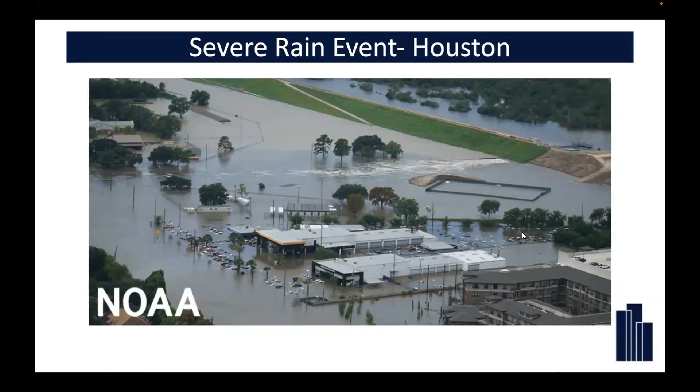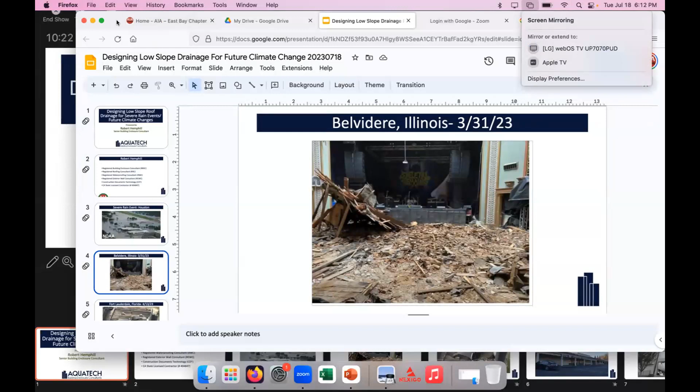The next slide shows a roof in Fort Lauderdale, Florida that collapsed. I don't know the specifics as far as how many people were injured, but again, it's an illustration that roof collapses are happening all over.

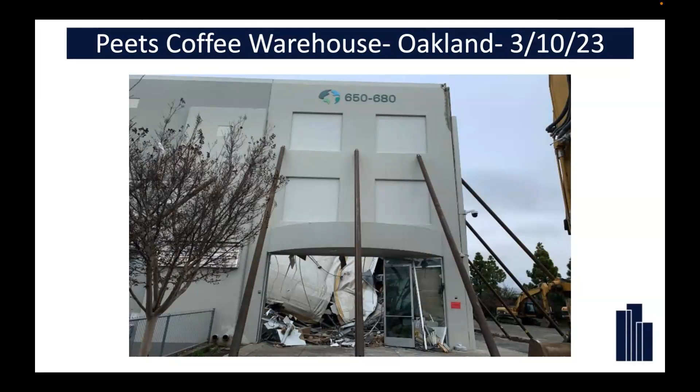These local events I'm going to highlight because I think with better design, we probably could have avoided these roof collapses. To summarize, I think there's a big problem with the local California building codes as they're written.

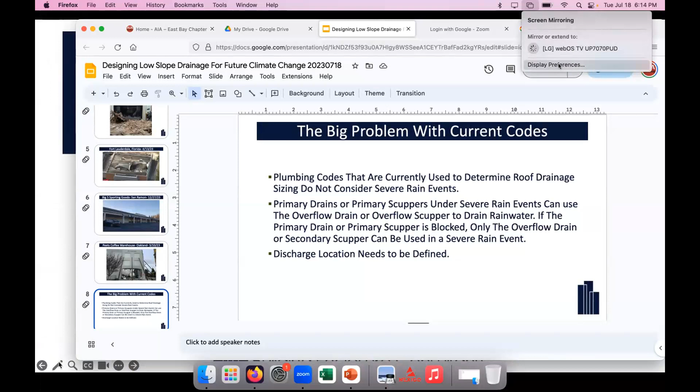One, they don't really size roofing drainage for severe rain events. The way roof drain sizing is done right now is you take a severe rain event for 60 minutes, expecting steady rain for 60 minutes, and that event takes place once out of 100 years. I think rain events are becoming more and more severe, more and more frequent. I know you're experiencing some of the weather issues that are out there right now.

The primary drains or primary scuppers. If you have a primary scupper that experiences a severe rain event, that primary scupper will actually take the rain off the roof along with the secondary roof scupper. These two drainage systems allow water to exit a roof under a severe rain event. However, if the primary scupper is blocked up or doesn't function, you're only depending on the secondary roof scupper to perform. That becomes a problem because instead of having a safeguard, now you're depending on one secondary roof scupper to take water off the roof.

The other problem with the code is that they don't define what a conspicuous location for roof discharge or roof drainage is, and that becomes a problem. You're going to see this in the slide. It's particularly poignant because there was a roof collapse event where one person died, where if the overflow drain had been located in a conspicuous location, that life may have been saved.

We're going to start with learning objective number one: how to size roof drainage. This next series of slides will show you how roof drainage size is done.

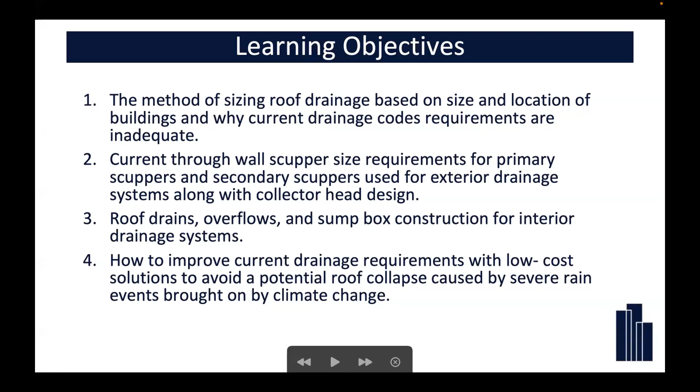Problem with the current codes is throughout the United States, there's a lot of different states that use different codes. We in California use the Uniform Plumbing Code for roof drain sizing. Other parts of the country use the International Plumbing Code for sizing, and New Jersey actually uses their own particular code. There's states and cities that mix up different parts of the code, so you're going to see a stark contrast of what the problems are with different codes.

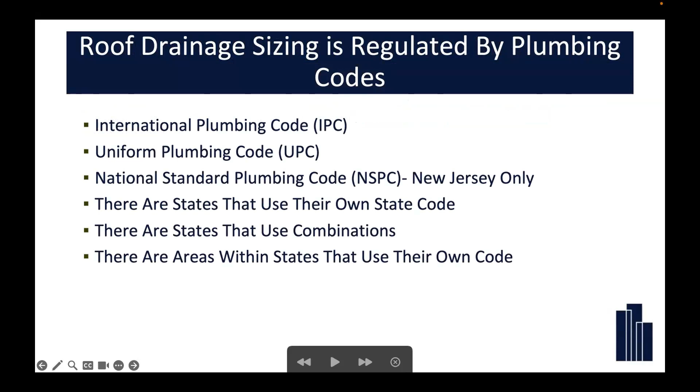Going further, we're going to talk about how to actually size roof drains themselves. According to the International Plumbing Code, which we don't use here in California, you take the roof area, the square footage of the flat roof area, and add half of the square footage of all the walls into the equation to determine the size of the roof area that you need to drain.

This is probably pretty simple. You take the roof, you take all the walls, you add all the square footage of all the walls in this particular case, add that to the roof area, and that's the actual size of the roof that you have to drain, and that's how you size it.

The problem is when you use the UPC, it's a different set of parameters. The UPC breaks it down into a lot of different categories, and we'll go over these so you'll see the differences between the UPC and the IPC, and why some parts of the country go with the IPC and why we go with the UPC. I don't understand it—to me, the UPC is a better code provision itself.

For the UPC, you take the roof area and add 50% of a wall area, similar to the IPC, which adds 50% of all wall areas. But the UPC is a little different: the Uniform Plumbing Code says if you have two walls across from each other, they basically cancel out. The theory is that the rain direction is in one direction, so one wall blocks the rain and another wall collects the rain—the net effect is zero.

For adjacent walls, the UPC defines the roof drainage sizing requirement as taking 35% of one wall area, 35% of the second wall area, and adding that to the roof area—that's the actual roof drainage area you have to account for. The theory is that wall 1 and wall 2 will block each other somewhat, so there's not as much rain, not 50% rain as with a single wall.

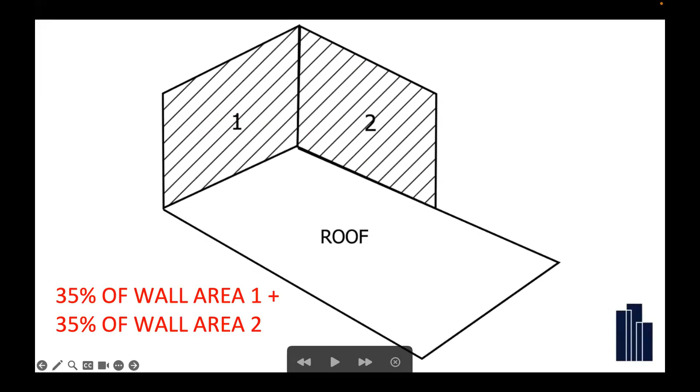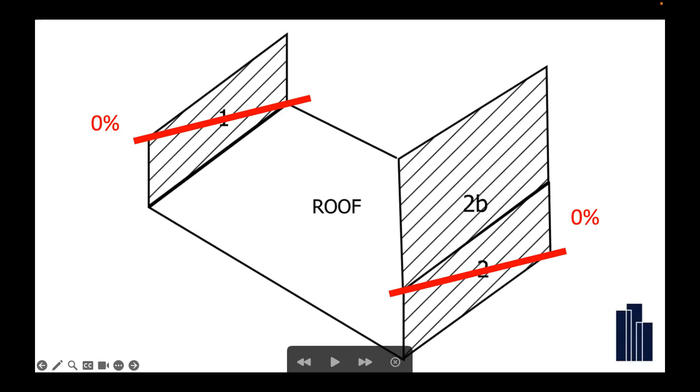Take a situation where we have wall area 1 and wall area 2—we both know they cancel each other out. James is going to tell us what 2B is. What would you add to the calculations of that roof area for wall area number 2B? We know these cancel out because they're across from each other. James says 2B is going to be 50%. James is right, thanks for listening James.

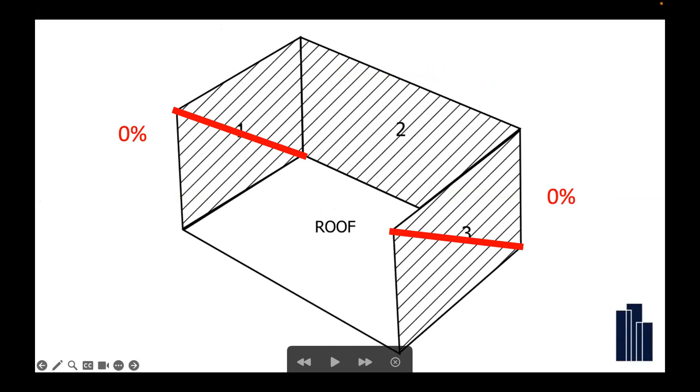All right, you're learning how to do sizing of roof drains. Frank, 1 and 3 we know cancel out—this is according to the UPC, not the IPC. What's the roof area requirement for 2? Excellent, Frank. You can see how it gets more and more intricate, but it's really not complicated when you break it down.

We all know that because the walls are across from each other, they're zeroed out, and wall area 2B, James, is 50%. They're not adjacent, 50%, side by side, 50% of wall area 2B. Here's another roof area, we know all these. James, now you got this one. Yeah, 35%.

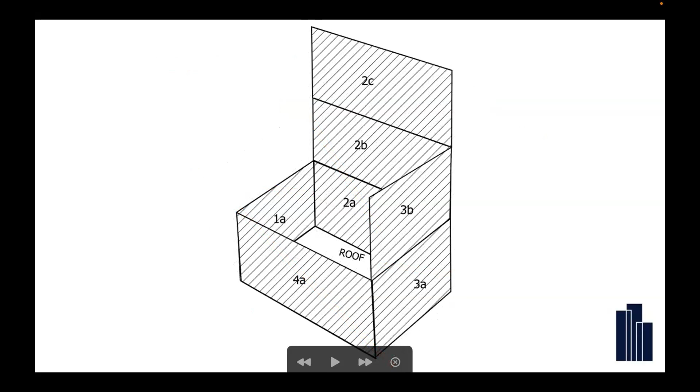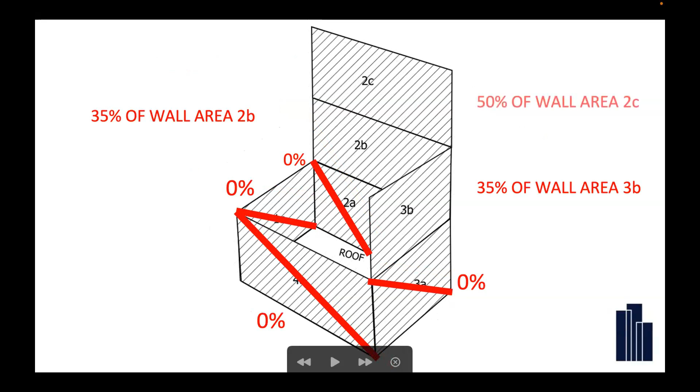Okay, another scenario, we know we have all the zeros at the bottom because they're all across from each other. 2B and 3B are going to be 35%. And Robert, what's going to be 2C? 50. Robert says 50%. There you go, 50%. All right.

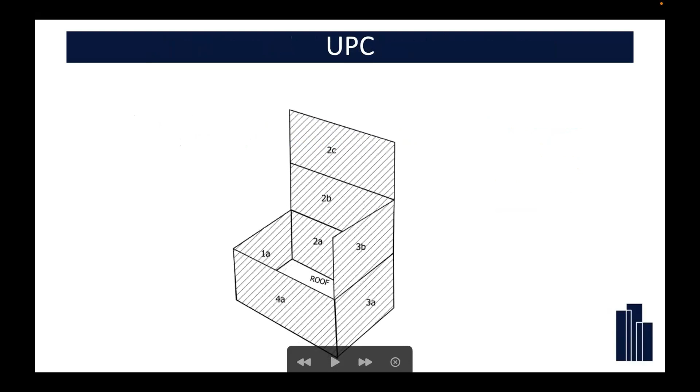Problem with the UPC, it doesn't jive with the IPC, International Plumbing Code. Remember, some states are following the UPC, some states are following the IPC. IPC, getting back, 1/2 of all the vertical walls. So in a particular case like this, IPC is saying 50% of all these walls are added to the roof area. And the UPC, again, it's different from the IPC. They eliminate all these walls on the bottom.

You've got 35%, 35%, 50%. The UPC, to me, is a more thoughtful code than the IPC, but you can see that there's probably a universal or statewide issue as far as what this square footage of a roof area that needs to be drained.

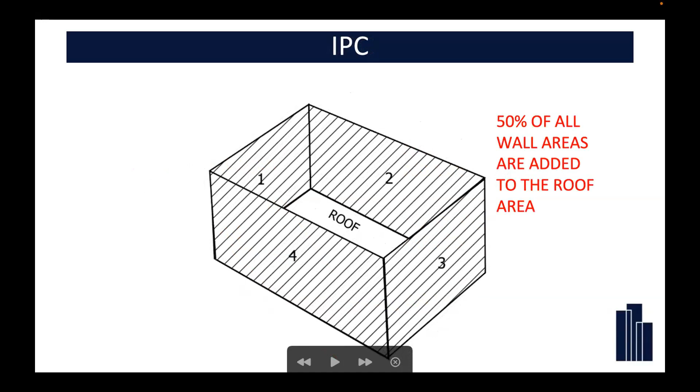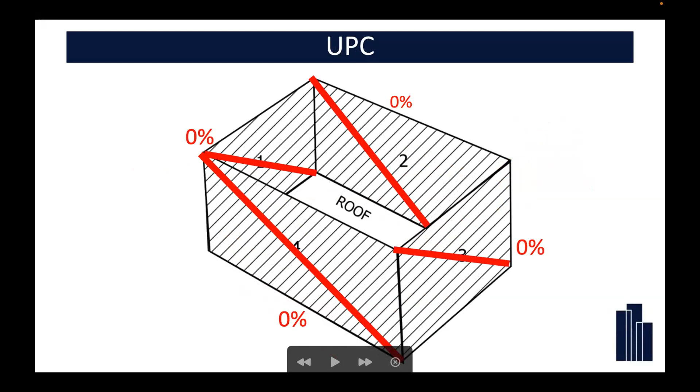IPC, we know in this particular case, Frank, how much do we add for all these walls? 0, Frank. Oh, for the IPC, sorry, Frank, you're right. For the IPC, 50%. For the UPC, what do we add? Excellent. Whew, sorry about that, Frank. I take that back, no, I do. Don't add. All right.

I apologized. All right, getting back to the UPC, we're going to talk more about them specifically because that's what we use in California. You take the roof area plus the wall area calculations, which you all learned how to do. You take the rainfall rate and the amount of inches for 60 minutes, and I'm going to show you more about that. You have to convert that to gallons per minute. These formulas are, there's a constant, 0.0104. This constant is not really that important to remember.

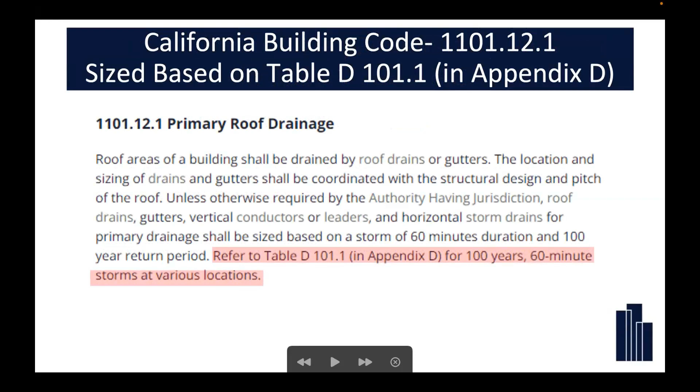It's nice to know how the roof areas are actually calculated, including walls. But most of the time on a project, the structural engineer is going to calculate the rain requirements, or the plumbing engineer itself. But just to show you that the California Building Code, the roof drainage is based on Appendix D in the actual plumbing code itself. You have to refer to the plumbing code. You have to convert the roof area to gallons per minute.

And that tells you what the actual, oh, I went backwards, my bad. All right, it jumped ahead. UPC, Uniform Plumbing Code, Appendix D in the code itself. It tells you what the rainfall rate is for 60 minutes and a 100-year interval, and it says 4.6.

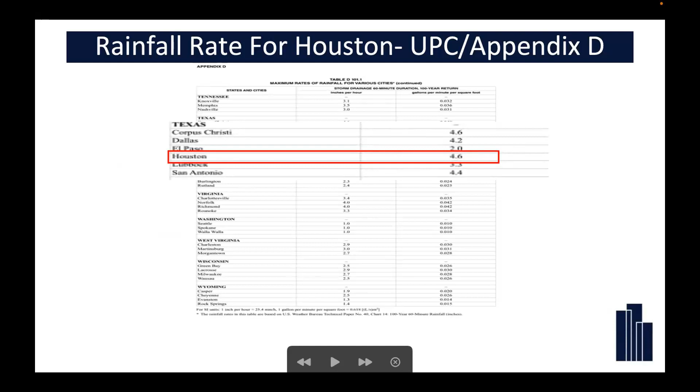I'm going to compare this with San Francisco. So that's why I'm showing you Houston. The National Oceanic and Atmospheric Administration has a better chart. Instead of doing every 60 minutes, they can break it down to 60-minute times, or they can break it down to 15 minutes or 30 minutes. There's a lot of different information they've calculated instead of just the Appendix D with 60 minutes.

When you have Houston saying that for 60 minutes, 4.6 inches per that hour of time is what you're going to get. If you had a sudden rain event and you had 30 minutes that deposited 3.54 inches, and you added another 15 minutes, and for 15 minutes there was no rain whatsoever, you're still above that 4.6. This code is inadequate for Houston.

And what Houston did was very smart, is that they had made an amendment to their actual code. And they just said that for all primary roof drainage, all roof drainages, we're going to assume 8 inches per hour.

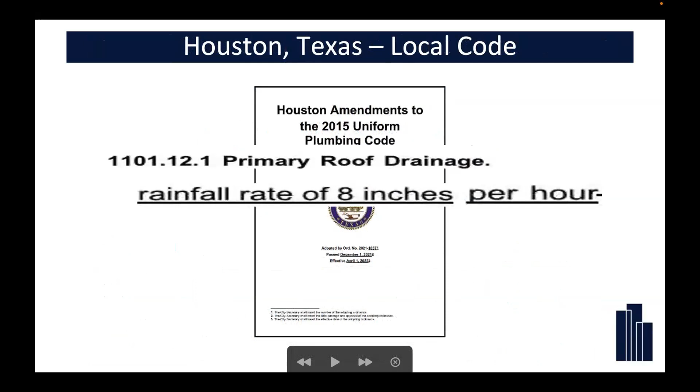Now, here's a case where San Francisco, where we are, the UPC appendix, oh, we lost the D, but it says 1.5 inches. You go to the National Oceanic Atmospheric, you break that down. Let's say rain doesn't fall constantly at the same rate for 60 minutes. Rain falls at different rates. For 60 minutes, according to the NOAA, it's 1.29.

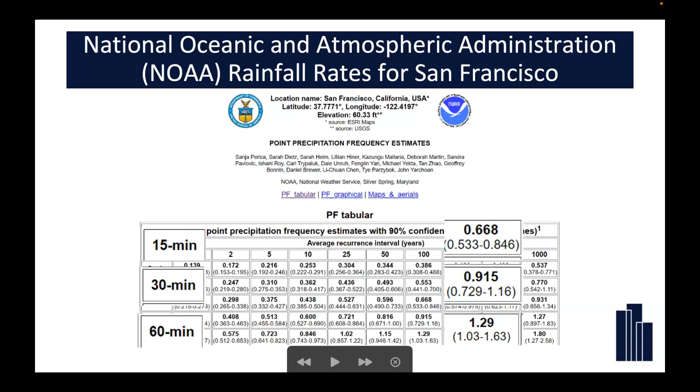You go for 15 minutes, they say it's 0.668. For 30 minutes, it's 0.915. So if you took a rainfall for an hour and for 30 minutes it fell at 0.915, and then added the 15-minute figure on top of that, you can see it's already above what San Francisco thinks is going to be 1.29.

San Francisco is also a little bit strange. It's the only city I know of that actually mandates you take the storm water and tie it into the sewer system itself. If anybody knows another city that does this, I don't know about it, but it's a strange thing about San Francisco. It's actually in their local building code—you take the rainwater, storm water, and tie it into the sewer system itself.

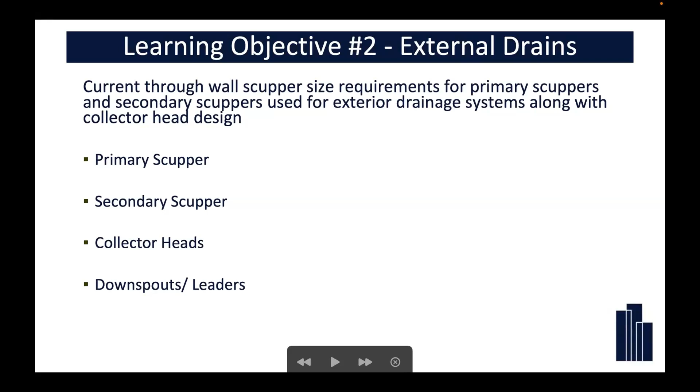Our learning objective number 2 is going to be on external drains. I broke it down to primary, secondary, collector heads, and downspouts—all parts of drains that are external to a building that are piped to the outside.

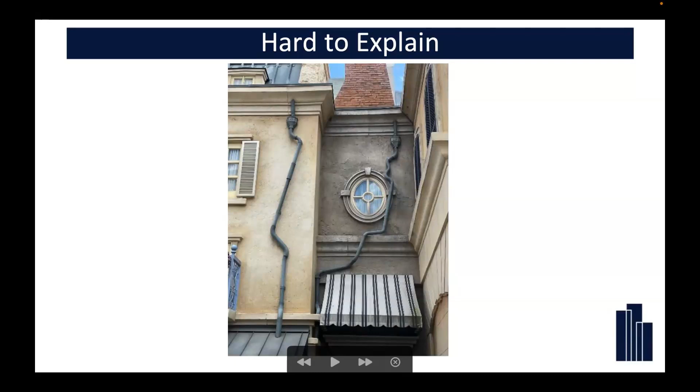Getting back to the California Building Code, we're going to talk about secondary scuppers. They're required for entrapped water. Anytime you have a wall that can collect water, you have to have a secondary—there's no ifs, ands, or buts about it. It's very clear that any area wall that can trap water, you have to have a secondary, a way of getting water off that roof in case the primary is blocked.

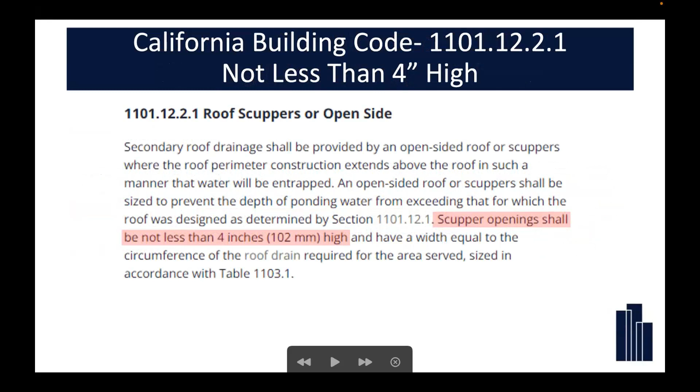Another code requirement, this is going to sound really strange between the two: the California Plumbing Code demands that the scupper opening be at least 4 inches minimum—that means height times width, so it's got to be at least a 4x4, doesn't matter what. However, the California Building Code says the scupper has to be no less than 4 inches tall; they don't talk about the width. Why one has a 4-inch minimum width times length, and one has just the height, I don't know, but that's okay.

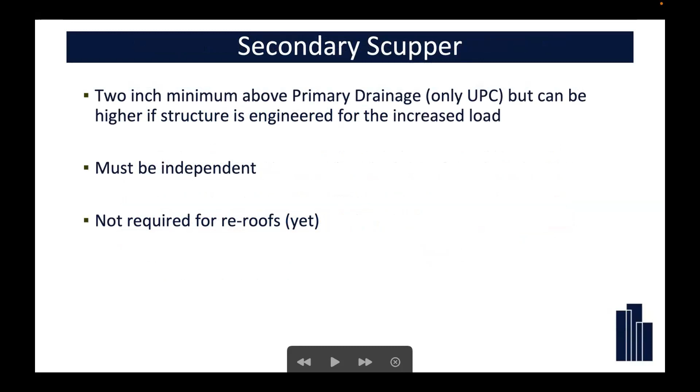We're talking about the secondary scuppers. There's some code requirements: 2 inches minimum above the primary, must be independent, not required for re-roofs yet. Secondary roof drains must be at least 2 inches above the primary drain. I don't know exactly why this 2-inch requirement was made, but I have a couple of theories. One, if the primary is blocked up with debris down low, at least your secondary is up a little higher, so maybe that debris isn't blocking the secondary. The other is that the secondary has to be independent of the primary, and a 2-inch height requirement actually moves it away from the primary a little bit. That's the only reason I can find for this particular code requirement, but it's there.

The other part of it, California code requires independence of the primary roof drainage—the secondary system has to be independent of the primary, so it's got to be separate. This code requirement is also changing: next code cycle, all re-roofs are going to require a secondary roof drain automatically. But currently, if a roofer goes up and re-roofs a building that has only one primary drain, they don't have to add a secondary scupper by code.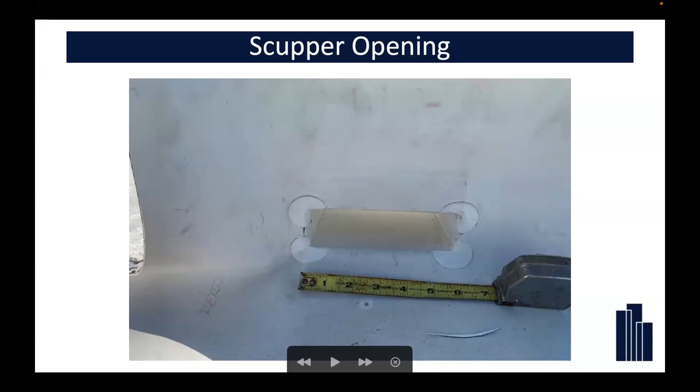This particular roofing contractor had all these overflow scuppers made for this particular project, and he made them all wrong. They don't meet code. It has to be at least 4 inches minimum. You can see in this scupper opening, another job in Tracy I was on, the scupper opening is less than 4 inches. It's got to be at least 4 inches tall and 4 inches wide if you go with the plumbing code.

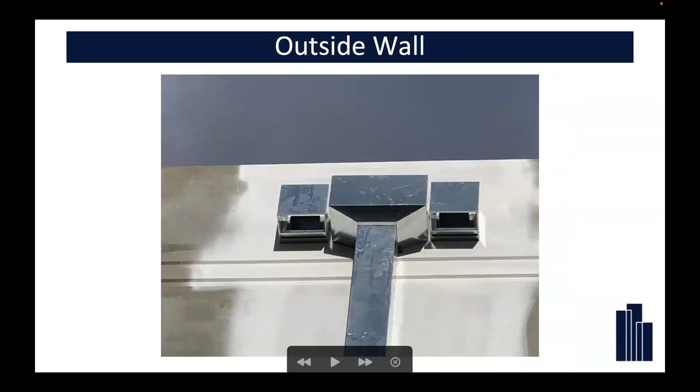Job in Oakland I was on. Here's an outside wall. In the center you've got a primary scupper. On the right and left-hand side, you have secondary scuppers. It all looks pretty good until you get into the interior of the wall and look at it. There's the primaries in the middle, the secondaries are on the side. I threw a tape measure on it. The primary is 24 inches across. That's a nice size, it's a big building.

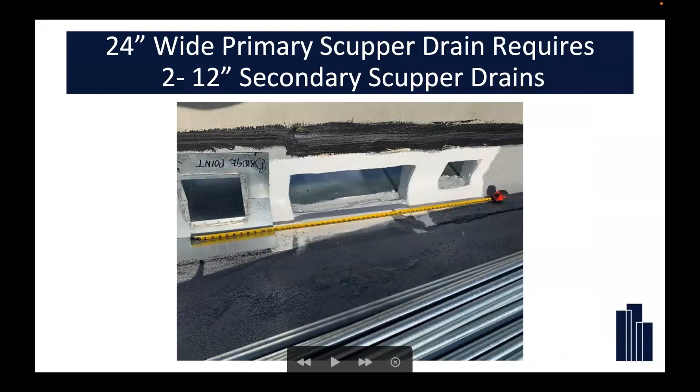But the secondaries are only 8 inches wide. So you basically have two secondaries that are 8 inches wide, 16 inches, trying to make up for a 24-inch primary scupper. This could be a problem.

Now I've heard this argument before, and I've seen this detail before, where an architect will draw this collector head and put a circle or a hole, an outlet, in the actual collector head, which on the surface that architect will tell you, well, this is an overflow. It's effective in case there's a lot of rain, it can actually drain out of the overflow. But I always ask this question.

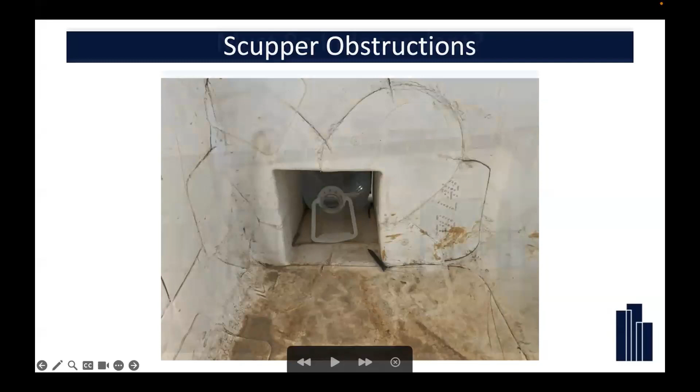Another job, another architectural, AIA East Bay architectural tour that I took. Here's a case where, again, a new building, and I'm looking at this and saying, okay, where's the overflow? I thought I would be polite, so I sent an email to the actual architectural firm, the guy that was doing the tour. And I said, by the way, I'm just concerned that there doesn't seem to be an overflow on this particular project. I'm looking at this building, it looks like you have a primary scupper only.

Well, the architect was very nice. He wrote back and said, in this particular case, the overflow is stacked right on top of the primary. So what you're looking at is the primary, the overflow is actually, the actual primary is unseen, it's going into that collector head. But remember the rule, 2 inches minimum. It can be more than 2 inches if it's engineered. But if the primary scupper is 4 inches tall minimum, remember James, that's 4 inches of water that's going onto that roof.

Anyway, not done correctly. Oh my God, another job in Oakland. No, this was actually in Berkeley, right around the corner. You can see that there's a scupper at the bottom, it's rectangular. There's a round circle at top, that's the overflow pipe.

Remember, when you're sizing drainage, if you have a drain coming from the vertical, the water can get completely around the hole and drain down. But if you have a hole that's on a wall like this, the water that's supposed to drain out is only going to drain out at the bottom of the hole.

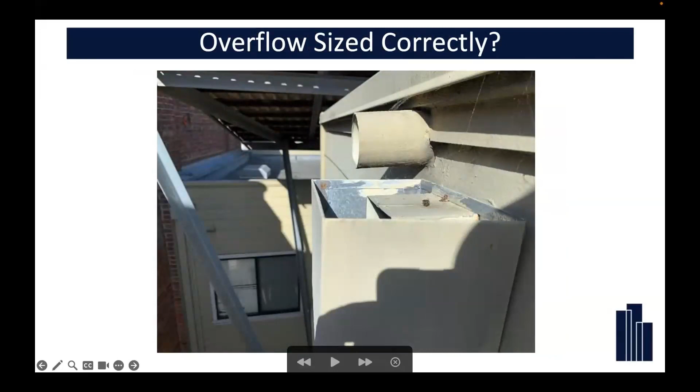But showing you what I actually saw on this project site, you see the overflows are round circles, but the scupper is a rectangular object. What's worse is they actually took a downspout and ran it in the middle, a downspout from the roof below, and blocked off some of the drainage. This is not the way to do it.

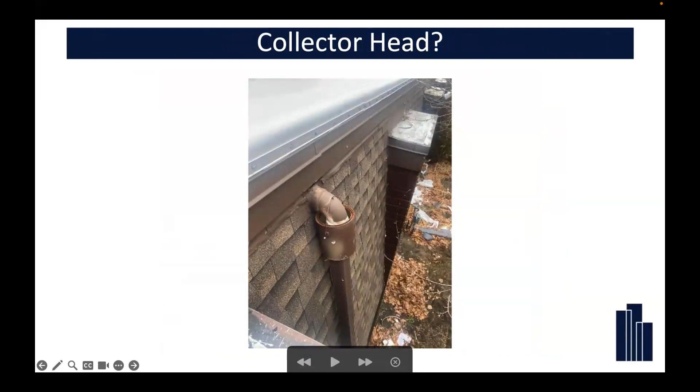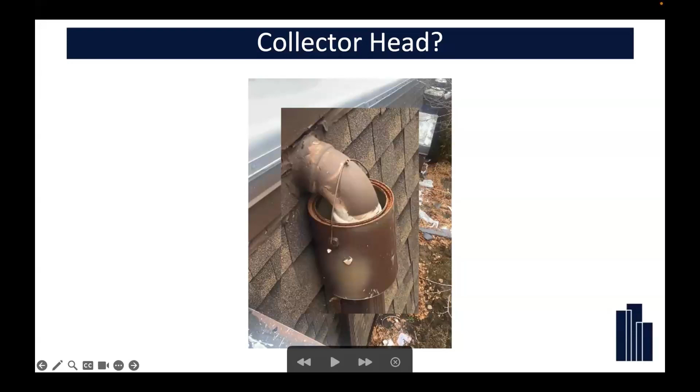All right, collector heads. We're going to talk a little bit about collector heads. This one is actually kind of a nice job in a way, they're recycling building materials. They took a paint can and made it into a collector head. Lots of problems with this, but it's ingenious. It's not the correct way of doing a collector head, and we're going to talk about that in a second.

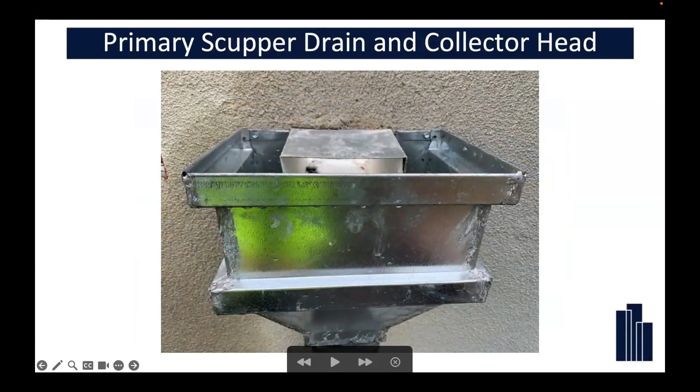This is a horror story from a project in Oakland I was on doing window testing. They have a collector head mounted up really high. And I get this point a lot, where somebody says maybe they want to just hide the primary scupper. I always point out, well, how are they going to hide the overflow? Anyway, so they hid the primary scupper, ran the collector head up too high, and cut the back of it. And what happened was it started to leak.

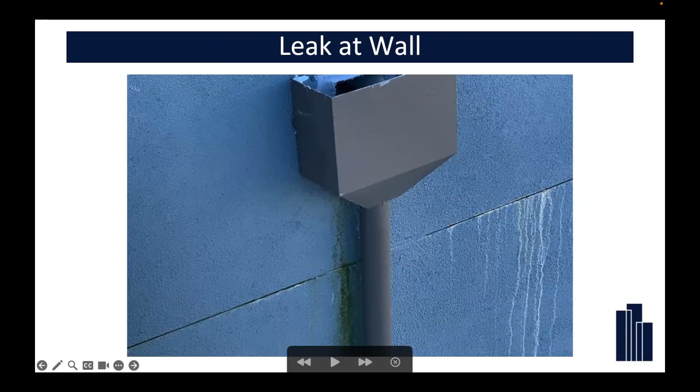I know it's hard to see, but at the wall, not between the leader pipe and the collector head, but the wall itself, it started to leak. It's draining part of a green roof, that's why you see that green stuff there. It hit a control joint on the stucco and ran across.

One thing I want you to look at is down below. This building is like 80 feet up in the air in Oakland. Somebody's got this horrendous looking thing on a new building, because the collector head is too high. They did it wrong.

I went out there six months later, just doing testing again, and this is what it looks like. Can you imagine having a building like this, a new building, 80 feet up in the air, and you've got this stuff going on?

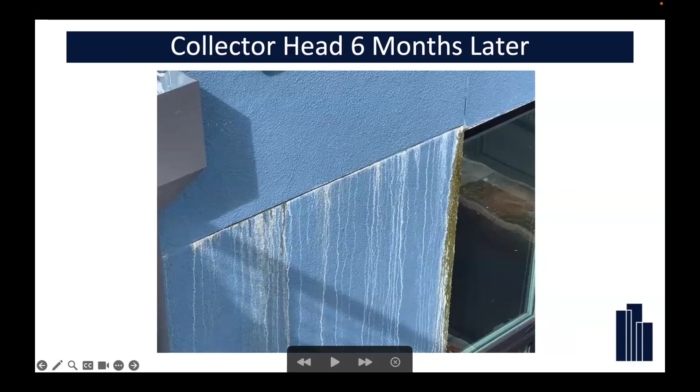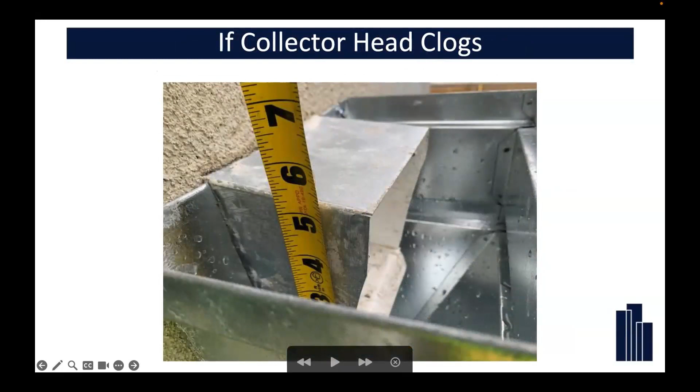If a downspout gets clogged up or the collector head backs up, the collector head in this particular case can direct 5 inches of water back onto that roof. Whether that roof is engineered to take 5 inches of water, I don't know, but this is a poor design.

Oh no, it's got to play. Mike, what's going on here? Are they seeing that? What are they seeing? Okay, maybe. All right, I hope this plays.

This is a key point: collector heads and downspouts can clog up.

Oh no, it didn't play. I'm sorry about this, guys. It's really a great visual.

And it's supposed to play as a video. Don't know why. Any reason, Mike? It played in the office today. I checked. I made sure it played.

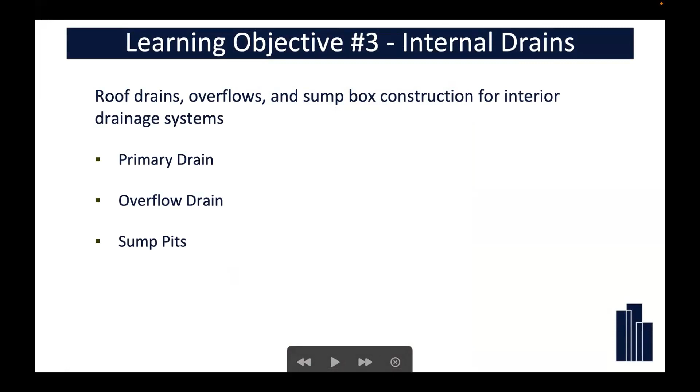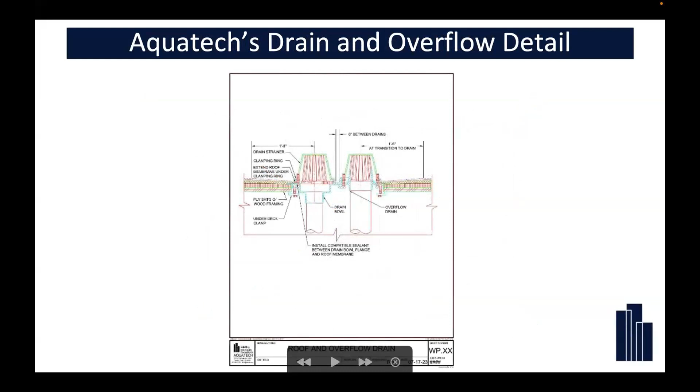In Aquatech, we draw up a drain and overflow detail like this to show the components of the actual drain. If you ever see this detail or it's in your library or you're using it, get rid of it. Use this instead, and I'll tell you why.

One other point: there's a code requirement that roof drains shall have dome strainers, unless it's a flat roof deck, then you can have a flat strainer. This is a picture of an actual roof drain, overflow drain. You can see that there's a ring all the way around that's blocking that overflow grate, and that's the 2 inches that's required.

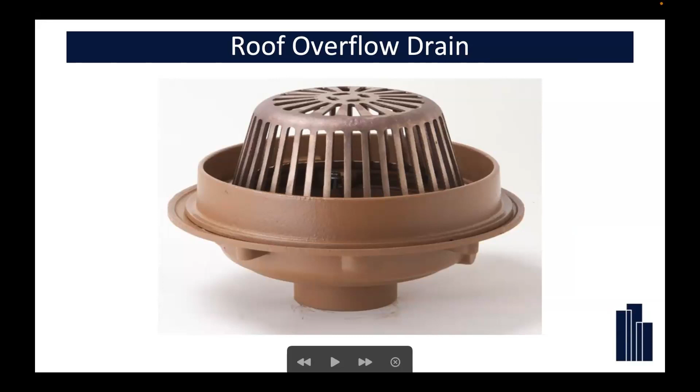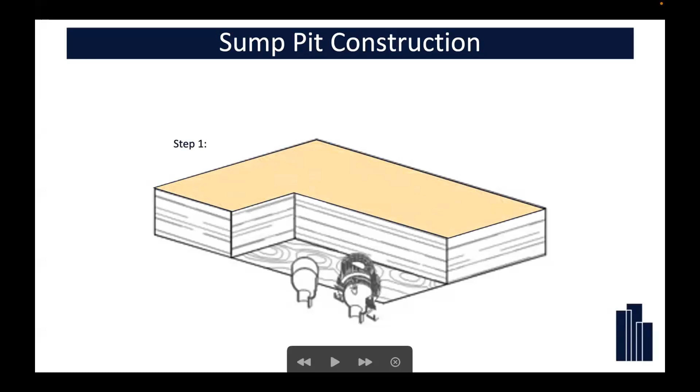I'm going to take you one by one through them. You have a sump pit construction. Some contractors have to actually build a recess into the roof area itself. This is a case where the sump pit construction is taken, and in order to detail this correctly, you have to put a field membrane on top of the roof deck itself.

You have to put a field membrane at the bottom of the sump pit. You have to build up the walls. Each one of these components takes a roofer time and trouble to put together -- a lot of welds that actually have to be done. You build the walls, then you have to do an outside corner on the top, and an inside corner on the top. All these 6 steps cost a roofer money and time and trouble to build a sump pit that we shouldn't be using at all.

Sump pits collect debris -- that's just what they do. They're flat at the bottom, they don't direct the water off, and you get accumulation of stuff.

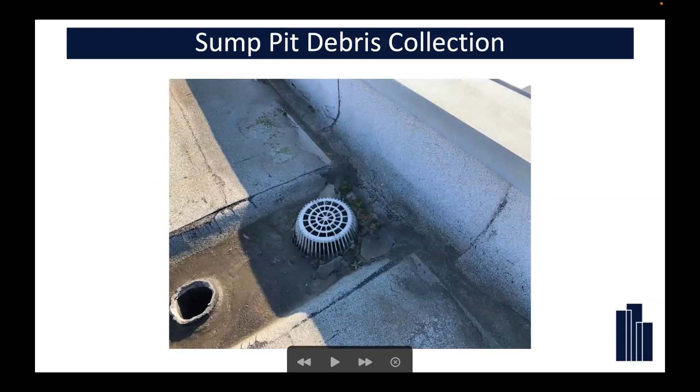A smarter way of doing it is to always use a taper drain system. There's a lot of different ways of doing it with tapering the ISO. In this particular case, they even actually make ISO with a taper system to the drain itself. We think it's a lot better detail.

This is a job in San Jose, a Hilton hotel, where they use the roof and overflow drain, but it doesn't have a sump pit. Everything directs the water to it -- a lot less time and trouble for a roofing contractor. All he has to do is put the membrane into the drain bowl itself, seal it, clamp it, and then he's done. He's not doing all this welding.

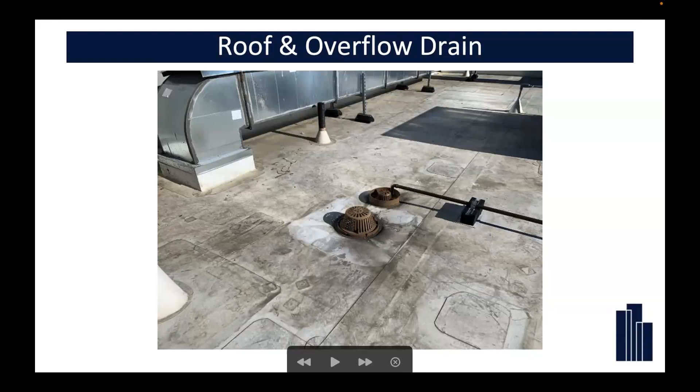Okay, we're getting towards the end here. What time do we have, James? Okay, we're doing it right. We're probably going to finish a little bit early.

That's okay, we're going to talk about best practices. This is what we at Aquatech always recommend, and I'm going to go step by step. We always recommend the addition of a secondary scupper on re-roofs. We know that this code change is coming, but we've always been recommending that if you have a re-roof and it doesn't have a secondary scupper, add one.

This is going to change, so it's not a big deal. This is actually the code requirement right now that is going to change. You can see that recovering doesn't require a secondary drain yet.

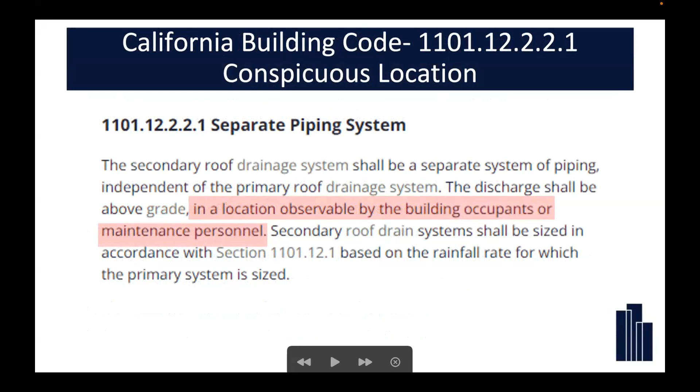We also believe in locating overflow piping in a conspicuous location. This is where we get into the tragic part of the presentation. I'll explain why. The code doesn't define conspicuous location. All it says is in a location observable by the building occupants or maintenance personnel. What that means, nobody defines it, but we will - what we recommend at Aquatech.

The problem with this is there's actually an exception to the code right now where you can take the overflow or secondary drainage and tie it into the primary downstream of the last primary roof drain. You can't see whether the primary drain is blocked up with this particular code exception, we think this is a bad idea. They should take this out of the code.

Trying to explain this a little bit further - job in Oakland, roof drain and overflow pipe. You can see at the bottom of the photo there's some new concrete that's been put there. That's where the primary drain is draining out. That pipe on the wall is actually the secondary overflow.

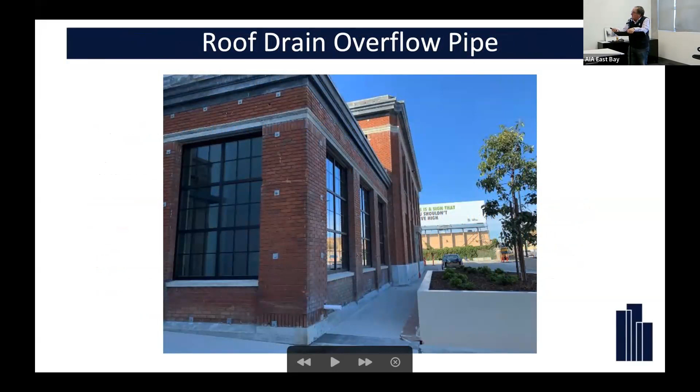It's in a conspicuous location. Whether it can be observed by roof maintenance personnel or anybody else, I don't know. You certainly could trip on it, but that's a conspicuous location. We don't think that's the best way of doing it.

Getting back to this tragedy - Peet's Coffee Warehouse, 3/10/23. I live in Oakland, I can tell you for a fact it was raining cats and dogs that night. At 3:30 in the morning, there was a man that was killed. He was in the Peet's Coffee warehouse. The roof collapsed.

Fortunately, somewhat, the next shift of workers was supposed to start in another half an hour. There could have been a lot more fatalities, but this could have been avoided if we followed putting an overflow pipe in a conspicuous location.

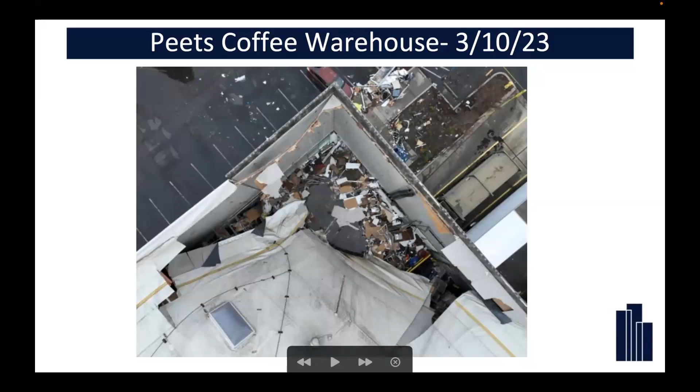I drove to the site - again, I live in Oakland, so it wasn't far away. Here's the actual picture of it, the collapse itself.

Here's the problem - these are two pipes. One's the overflow and one is the primary drain. Which one's which? Now, James, I know what you're thinking - you're thinking okay, they got the splash blocks, the splash blocks probably tell you that the primary drain is on the right. But if it's 3:30 in the morning, you go into work, it's raining cats and dogs, and water's only coming out of the overflow, not the main drain, you're thinking everything is normal. It's not a big deal.

There's a chance that if you had known that the primary drain was blocked up and water was only coming out of the overflow, you may not have gone into that building. You may have called somebody to say, hey, you got a problem up there on the roof - the main drain is blocked, water's coming out of the overflow.

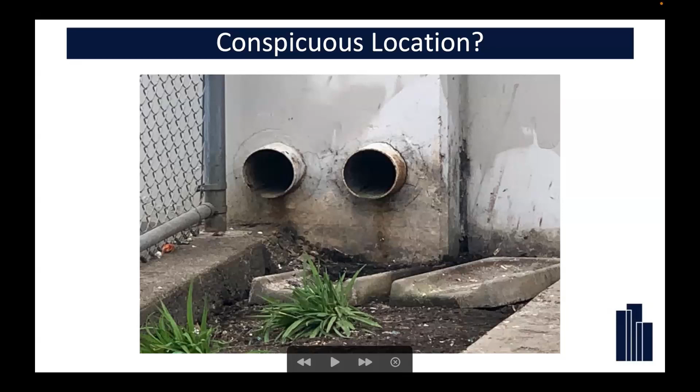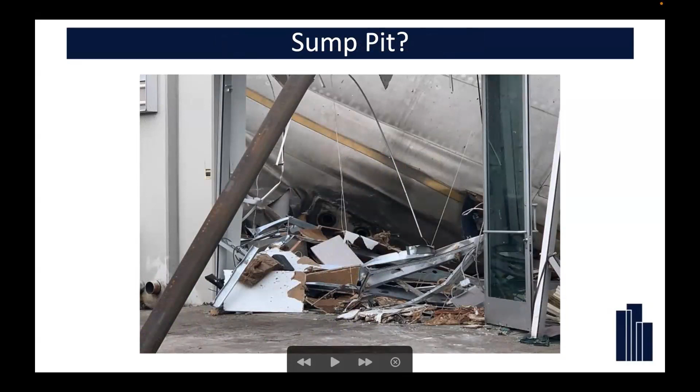In this particular case, here is the collapse. If you look at it, from you in the audience, it's hard to see, but there's a sump pit there. And there's an overflow ring that tells you that the overflow was on the left-hand side coming down the wall. I just think that this tragedy could have been avoided if that overflow had been in a conspicuous location.

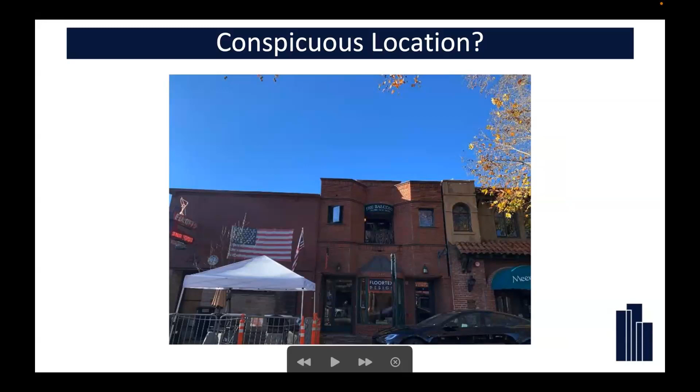Now I'll show you a conspicuous location. Here's a building, the building in the center. You're supposed to tell me where is the overflow. I'm sorry, I can't ask the audience because you can't see it that well. But here's a particular case where the overflow is right above a window, way up high.

Now, if this primary drain was blocked up and water was coming out of this overflow, it's 3 stories up. There's probably somebody on the street that might have noticed it. Whether they would have paid any attention to it, I don't know. But a fire department or a police department coming by, they might have said, hey, you got a problem. So locate that overflow in a conspicuous location.

I don't care if people get wet. We want to save lives. We don't want the roof to collapse. We want people to know that there's a problem.

All right, another best practice: double the size of the secondary scupper or add another secondary.

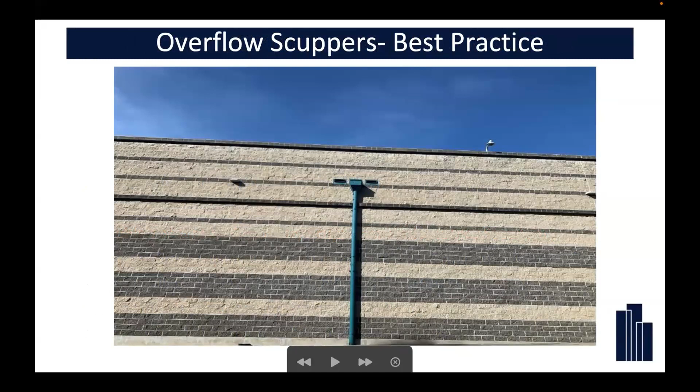Easy, this is done well. You can see there's a primary drain in the middle with the downspout, and on both sides there are overflow scuppers, twice the size or the same size, but it basically doubles the size of the primary scupper itself. Remember, if a severe rain event happens and water is coming down overwhelming the primary, the secondary kicks in, at least you're getting water off the roof. If the primary is backed up, then you're only depending on the secondary alone.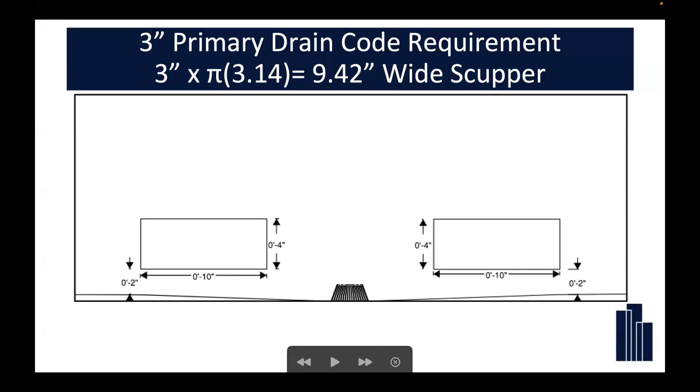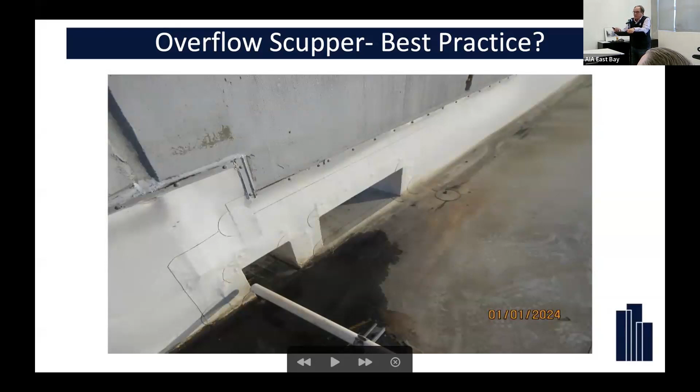So double the secondary. Here's a particular case—Frank took this photo, this is a Home Depot out in Tracy. What they did instead is they have the primary on the left-hand side, and the secondary, but they doubled the size of the secondary. In this particular case, the one negative I have is the overflow or secondary scupper is not 2 inches above, but the idea of increasing the size of it to get water off the roof is great.

And this example of a drawing shows doubling up the size of a secondary scupper, just making it longer. Okay, you're going to say, how much is it going to cost to actually do this?

I went to a manufacturer that makes overflow scuppers with skirts and got some pricing. One scupper that's 4 inches by 10 inches by 18 inches long costs $56.58. Remember, a 3-inch round drain is going to require a minimum scupper of 9.43 inches—3 times pi, 3.14. That's the actual size requirement for an overflow scupper. To add another scupper would cost $56.58. Times that by 10 different drains, you're talking about $560. Yes, it costs money for labor to cut a hole in that parapet wall, but that's a pretty cheap price. But it's even more economical if you just make the secondary scupper twice as wide, make it 20 inches wide.

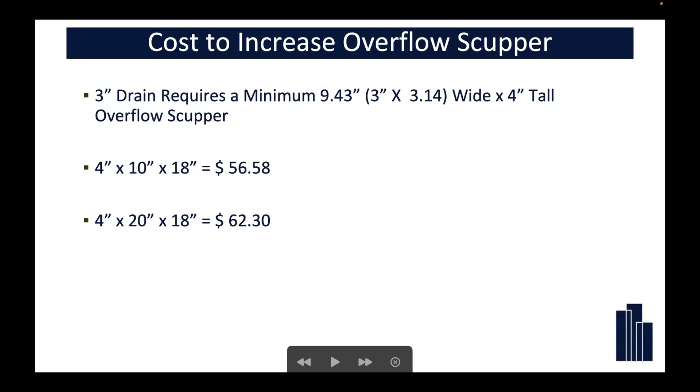Another one we're going to talk about is the Big 5 Sporting Goods in San Ramon on December 27th. At night, nobody was in the store. The roof collapsed—the fire department and everybody says it's because it was a severe rain event. What was more tragic is the actual roof collapse took down the mechanical sprinkler line, which also flooded the store. The good thing is nobody was in the store at that particular time. I went to the actual site just to take a look at it and find out what's going on.

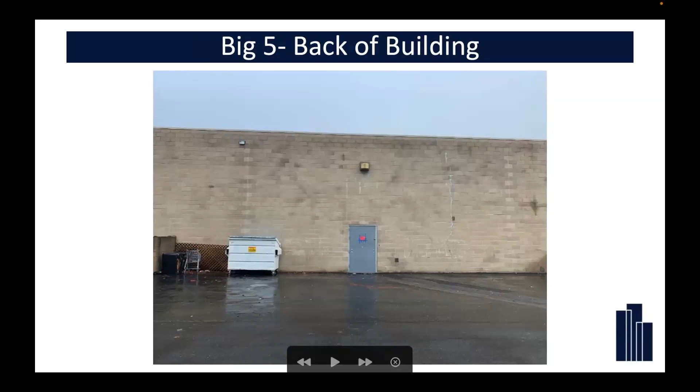You can see on the upper left-hand side there's an overflow scupper. The door has a tag on it—unsafe to occupy. Looking at it, it has a 4-inch cast iron drain with an overflow on top. We already saw that 4-inch cast iron drain.

So the question is, how big or wide should that overflow scupper have been to service something taking a 4-inch drain? James? Oh, see, you're good. Look at that.

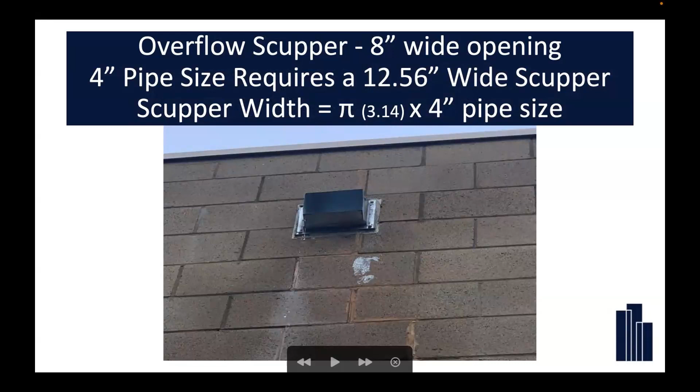12.56, nice. In this particular case, the overflow scupper—remember it's a block wall, 16 inches wide—it turns out the overflow scupper was only 8 inches. It was undersized for the particular drain it was supposed to service. It should have been at least 12 and a half inches wide. Anyway, whether that added to the collapse, I don't know, but we can do better as designers.

Another recommendation is to increase the pipe size of the overflow drain and eliminate that sump pit. Get rid of the sump pit. Here's a particular case where we took a 3-inch primary drain, and on the right-hand side is a 4-inch. We just increased the pipe by one size.

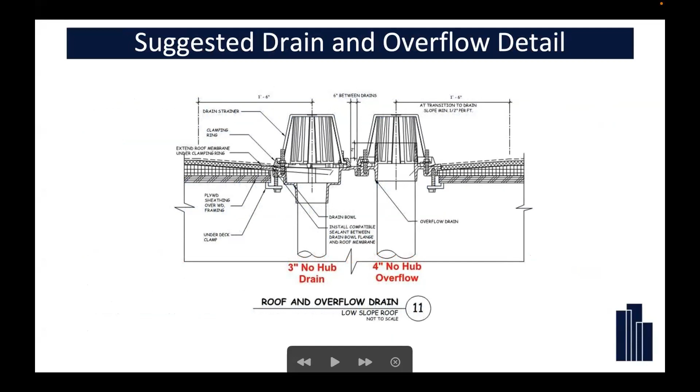The advantage of this one pipe size increase is in gallons per minute. A 3-inch pipe takes 92 gallons per minute off a roof. Increase it to 4-inch and you've actually doubled the size of the overflow capacity. Instead of having two separate scuppers, you just increase the pipe size by one size.

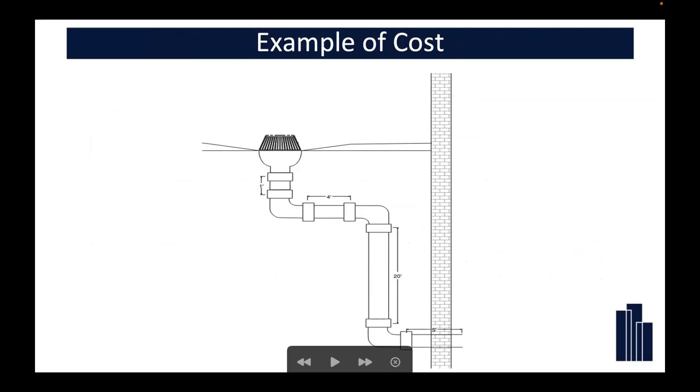And I know you're going to say, okay, that sounds like it's going to cost a lot of money. Well, I did the math. I took a 30-foot run of pipe, 3-inch pipe, and calculated the actual cost of fittings and couplings to make it 4 inches. If you take a 3-inch pipe, all these components cost a plumbing contractor $578. If you make it 4 inches, it's $729. So for $150 more, you can increase the overflow size by one pipe size.

It's probably cheap insurance. We always recommend, when you have overflow and primary internal drains, that you increase the pipe size of the overflow by one pipe size. It's cheap insurance.

Okay, here's the other one: SMACNA details, NRCA, collector heads. You've all seen this conversation about collector heads that have been butchered, cut in the back. They're not done right. There is a proper way of doing this detail that will save a lot of problems and a lot of aggravation.

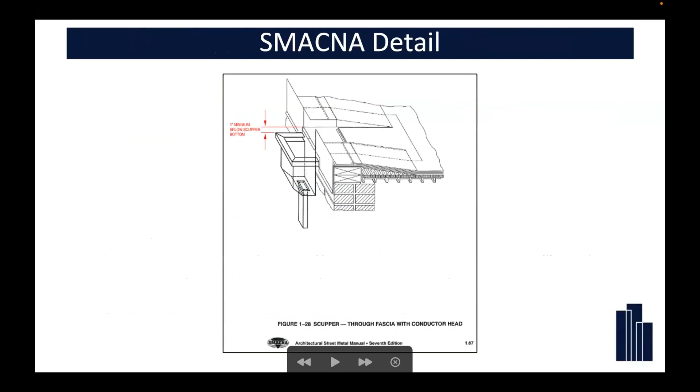SMACNA has their particular detail for overflow: a collector head tied into a primary scupper drain. They always recommend that the collector head be 1 inch below the bottom of the primary scupper outlet, 1 inch below. There are a couple of reasons why.

If a raccoon went down the pipe and you didn't get the chance to see it blocking up the collector head, or there's a collapse at the bottom with electrical wire running up through there, it doesn't matter. The collector head's not going to be affected. That water's just going to run right off the roof. You don't depend on the collector head or the downspout. If it's blocked up, it doesn't affect it whatsoever. This is what SMACNA recommends.

NRCA, I know you can't see it from the audience, but this detail has been in existence since 2007. Why are we letting contractors put collector heads to hide a primary scupper? Even though you can argue you're trying to hide it and you've got an overflow right next to it, these details should be followed.

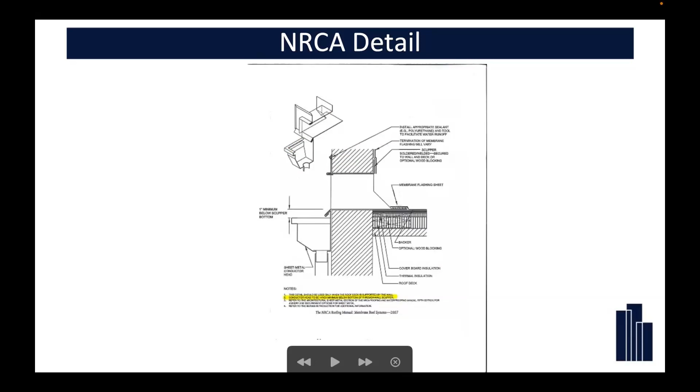Aquatech takes it a little bit further. We like the idea of the back part of the collector head going up to intersect and engage with the actual drip in the hem of the primary scupper. To me, this is a bulletproof detail. This is one that should be followed.

But at a minimum, we designers should always be designing with our collector heads 1 inch below the bottom of the primary. Forget these holes that you put in the scuppers. The collector heads just don't work.

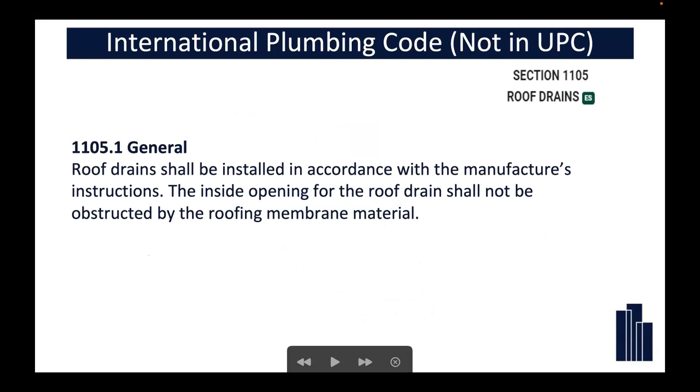All right, a couple more things. IPC has a requirement for material in the roof drain bowl itself to be removed. UPC doesn't. We think UPC should adopt what IPC does. Here's a couple of examples.

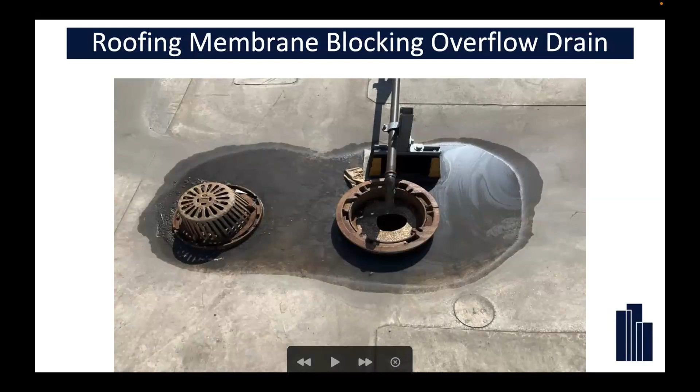That roof membrane material inside the drain bowl is helping to block up that drain. We want the drain bowl to be as open as possible to get the water off the roof as fast as possible. Here's a case where you can see the overflow drain is really blocked up by membrane material. This should all be cut back so it's not blocking the drain itself.

The last item on the wish list, and this gets to the end of this presentation, is that I'd love to see if we can increase the slope of a roof from the code requirement of 1/4 inch per foot to 1/2 inch per foot.

I know Frank and I both feel the same, that even if you have 1/4 inch per foot, you're always going to have a low spot somewhere. Yes, it's going to cost more money, but it would be nice if the code adopted this and just said no more 1/4 inch per foot, we need 1/2 inch per foot.

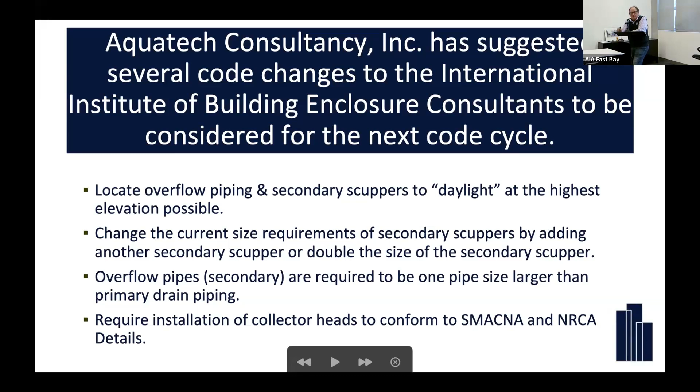When we're redlining projects out there doing peer review, this is what we do. For us, a small company of 20 people, we kind of do it all. We were on a job site where a large consulting company was doing third-party observations, another company was hired to do smoke testing on the vapor barrier down below, and we were hired to do the window testing. We could have done it all. One-stop shop. This is what we do.